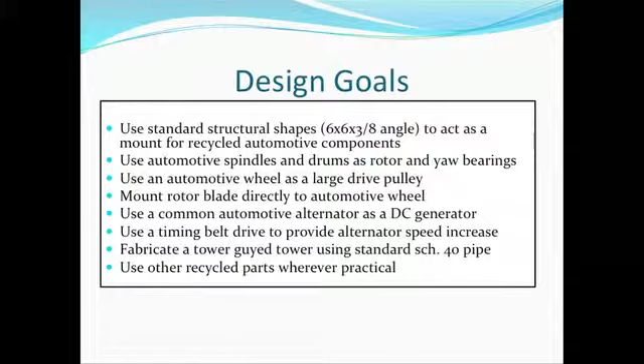They're designed for automotive use, so they can be plenty strong for what we wanted to use them for. We used automotive spindles and drums as the rotor and yaw bearings, the rotor for the blade and the yaw bearing so the machine can track the wind. We mounted the rotor blade directly to an automotive wheel. You'll see this. We used a common automotive alternator as a DC generator.

Alternators are a dime a dozen. I mean, they're scrapped all over the place. They're so cheap now that I see alternator rebuild shops kind of going out of business. You don't see as many as you used to see. So there's our DC source. We use a timing belt to drive the alternator. We got to speed it up somehow. We can't run it directly off the rotor, so we have to speed it up. We use a timing belt to get a speed increase, and I'll show you.

We're going to fabricate a guy tower using just galvanized structural pipe, and then we wanted to use recycled parts wherever we could. And the idea here was to eventually get folks to donate these parts so the material cost of this unit would be nothing, in effect. And we have CNC capability to do the basic machining that we need at Blue Ridge, or it'd be very easy to do. It's just drilling holes for the most part. I'll show you some pictures.

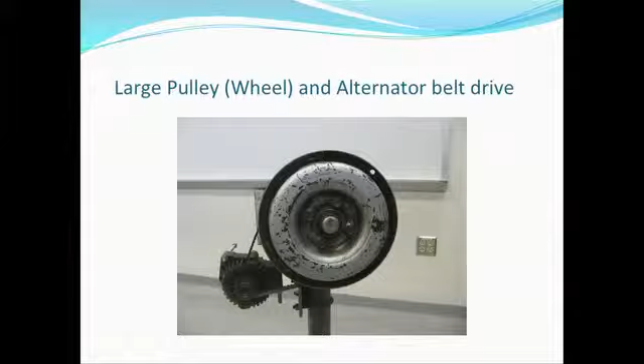This is a wheel, it's actually off of a VW Jetta, a front wheel, back wheel, doesn't matter. And you see the alternator mounted to it there, and that's the speed increase that we use, about a 7-to-1. We need to get that alternator over 2,000 RPM, 2,500 or so, before it'll put out any useful electricity. And we can go on. Okay. And there you see a side view of it. That's the belt drive from the alternator to the large wheel.

And when you start designing stuff like this, you got a lot of options in terms of what type of drive you're going to use. You could use gears. That would require some type of lubrication. You could use a friction drive. There's a lot of initial resistance to turning with a friction drive. You could use a flat belt, you could use a V-belt. There's a fair amount of resistance there too.

We chose the timing belt because we use a cogged pulley on the alternator, but we don't need to use a cogged pulley on the wheel because it isn't going to slip on the large pulley. It would only tend to slip on the alternator itself.

The whole point is this thing turns very easily, so we can just use the torque supplied by 12, 15 mile an hour wind to get this thing started to turn, and then once it starts to turn, it will pick up speed pretty quickly.

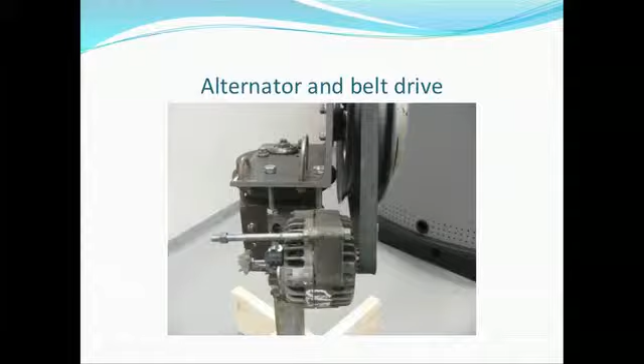And I didn't know if I show it, but we need to control the alternator's on and off. We can't just keep it hooked to the battery all the time, or the field in the alternator would run down the battery. This would be like leaving your ignition switch on in your car. Eventually, that would run your battery down. Take a long time, but it would run your battery down just by powering the field of the alternator.

So we have a centrifugal switch mounted on the back of that alternator that once the alternator is up to a certain amount of speed, that's what will turn on and off the juice from the alternator to the battery. There's that centrifugal switch. You see it mounted on the back there, mounted right to the shaft of the alternator itself.

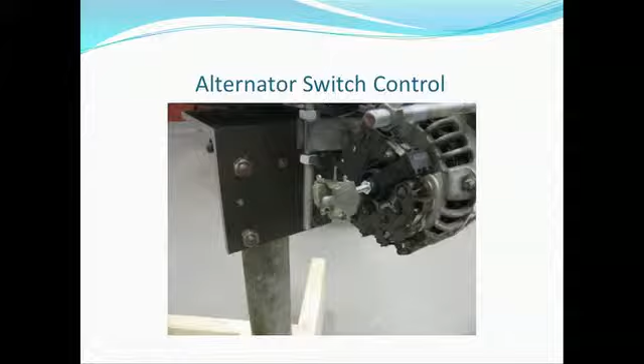And what we did to mount all this, we just used standard structural shapes. All of the units are mounted on 2 pieces of channel, very readily obtained common channel, 6 by 6 by 3/8. We got that actually donated to us too. And then we just drill holes in the channel to mount the components.

And the 2 spindles, and you can't see it, we'll look at a spindle in a minute, but we chose the spindles from the vehicles such that they are flat, and they just mount directly with 4 bolts. So, you know, you got a variety of different cars out there, but if you start looking around and seeing how they're put together, you find certain varieties that will mount much easier and without fabrication to the particular car part itself. Okay, one more. Nope, go back one, please.

All right, there you see a view of the back, and so what we have down at the bottom here, that's a brake drum mounted to a piece of channel with the tower below, and then there's another piece of channel that mounts where the rotor will go and mounts the alternator, and that's that standard 6 by 6 by 3/8 channel that I was talking about, and they just have holes drilled in them.

The 2 U-bolts you see there are where a tail vane will go in, because it'll be an upwind unit with a tail vane. Tail vane will just stick out the back, and in that brake drum underneath will be housed the slip rings. You know, whenever you're generating power with a unit and that unit is free to turn around, you somehow have to get a stationary output for the wires to come down the tower, or you will twist off the wire.

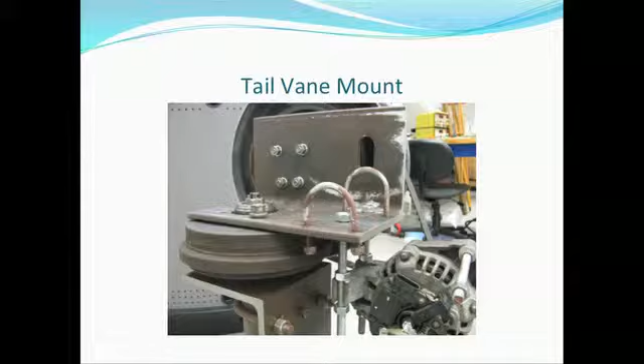And slip rings, again, there's a moving component that's charged and then a stationary component, and you slip them across. Next time you go on your next Ferris wheel ride or next time at the fair, look underneath and you'll see slip rings because they're getting power to that so it can move.

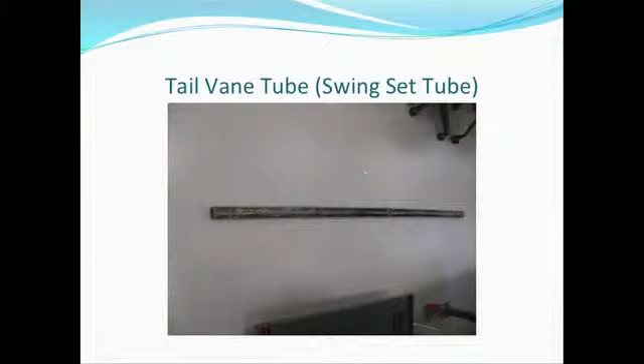Okay? Tail vane. Tail vane's just a recycled swing set tube. All right, tail vane tube, I should say. That'll have a piece of aluminum on the end of it to actually act as a tail vane. But all that is a steel, very light, very thin, recycled swing set tube. They're thrown away all the time.

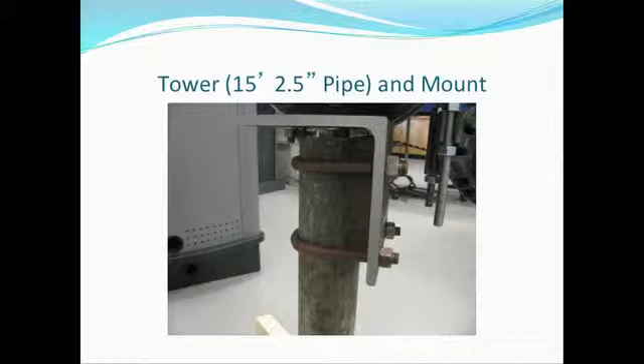Okay. Next, please. All right, there you get a view of how the tower connects to, again, that channel. There's the 6 by 6 by 3/8 channel, tower connecting to it. That's a 2.5-inch structural pipe. Schedule 40 pipe is all that tower is. That'll be 15 feet tall, and it'll be guyed with 3 wires.

That's probably the least expensive tower we could come up with. Just a simple guyed, single tube structural pipe. And the U-bolts that hold it, those U-bolts are the U-bolts that hold leaf springs to car axles. Okay, so again, we're trying to use recycled parts as much as we possibly can.

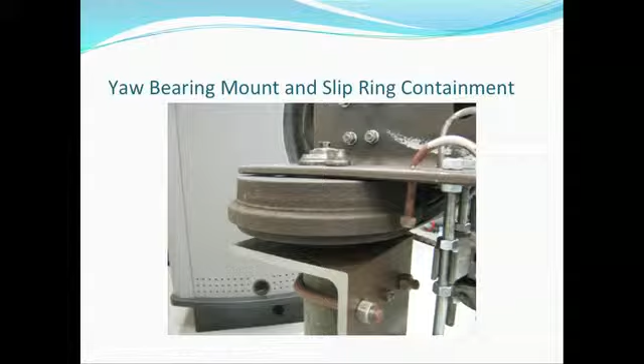Next. All right, there is again a picture of the brake drum, where the slip rings will be housed. There'll be a stationary part mounted to the bottom of the channel there, or the top of the channel, and then the moving part will actually be the brake drum that goes on the inside. There'll be two connections, a plus and a minus.

We could actually, just like a car, get by with one and just ground everything and have that be the minus connection, but usually on a wind generator that's not a very good idea, because when you do that, you are sending the minus through bearings. And it's never a good idea to send electricity through bearings, because it will pit them over time and deteriorate them. So you want to supply a separate path for that minus connection. One more. Okay.

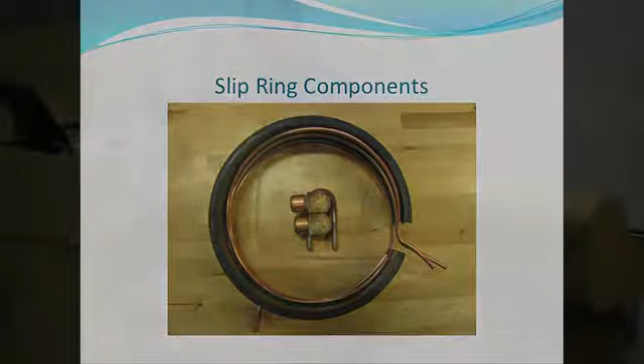That's what the slip rings look like. Just two. The part in the middle will be stationary, mounted to the bottom of the channel, and the wires you see going around, they will turn with the unit completely as you see it there. So there again, pretty simple parts. That's just a piece of PVC pipe that'll act as an insulator inside the brake drum, and the wires are just laid into it. And those are standard plumbing components that you see for the other ones.

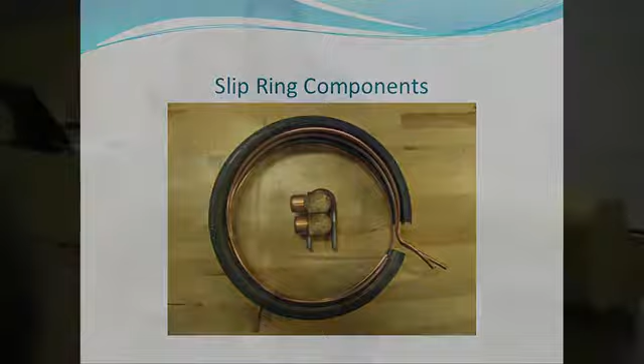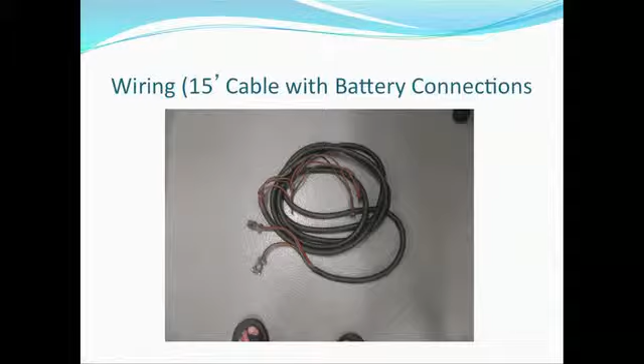They'll be spring loaded against the wires there that you see. And PVC insulators there, because you want to insulate that as it comes down. This connection will go straight to a battery. The idea would be that as a battery is charged up, whoever wants to use it wherever they need it would take it, and then you'd put another battery on to charge it up. And they could measure that charge with a voltmeter if they wanted to. While the unit wasn't running, that would probably give them a good indication of the charge of the battery.

It's a simple two-bladed rotor, and there's a lot of reasons not to use two-bladed rotors. Three is obviously for a lot of reasons the ideal situation, but whenever you start talking a three-bladed rotor, your connections for the three blades become much more complex. This is simply made out of a 2 by 6 by 10-foot board. So you can make a rotor that works pretty well, and again, we're relying on the robustness of our components to withstand the negative of a two-bladed machine, which tends to yaw through a series of jerking motions. But that should be all right for this unit. It'll be built strong enough.

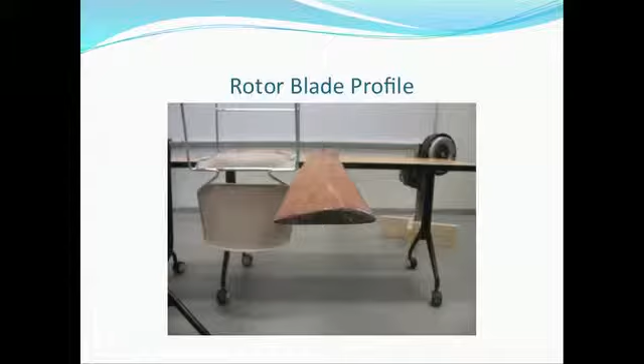And that's what the blade looks like at the end. It probably has about a 3-degree angle on the end, going up to a 12-degree on the root. But it's very simple to fabricate. I fabricated this blade in about an hour with a draw knife, and have tested it, and it works pretty well. So again, we wanted to keep the minimal amount of effort in this and make it as cheap as possible.

Excuse me? Yeah, it would be treated. Well, no, it would be coated with some kind. Yeah, at least. You'd have to protect it from the outside. That might be the end. Let's see if we got anything else here.

That is the end. So that's what we plan to do, and we've got this probably about 80% constructed, and we're gonna test it at Blue Ridge, send it down to Haiti, see how she does, and if it works well and there's a need for more, we will potentially start going around using our SIFE people, our Students in Free Enterprise, to get these parts donated to us. We'll specify what parts we need, and we'll start building multiple units. Well, that's what I want to talk about.

The turbine itself stands on a 120-foot tower. Blades are roughly 11 feet long. And the Czajkowskis are very happy with this installation. It was a really easy installation to put up, and this is probably one of the smoothest projects we've ever worked on for small wind.

So it was a couple months that we worked. I think we signed the contract in January of this year, and it was completed within 10 weeks. That's a really quick project cycle for us. We were just involved in the construction phase. These students did a lot to gain community support. They got all the permits, they got the money for the project. It's really an amazing model, and I hope it inspires other people down here to do something similar.

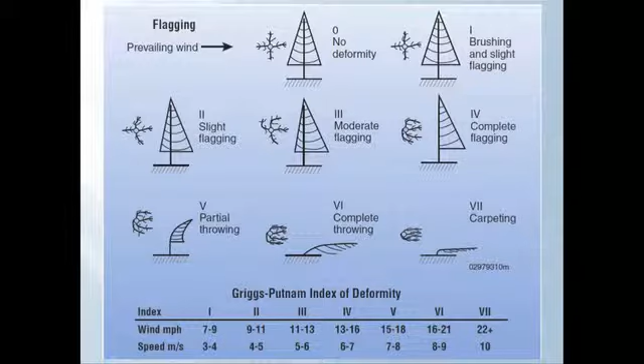If you're trying to determine if your site has wind, one of the very fundamental, easy things to do is to look at the tree growth. In this picture, you're looking at trees from the side, and next to the picture, you're looking down on the tree. You can see how the branches in a higher category of wind start to grow to one side of the tree. In our yard, we're at about a 2 or a 3.

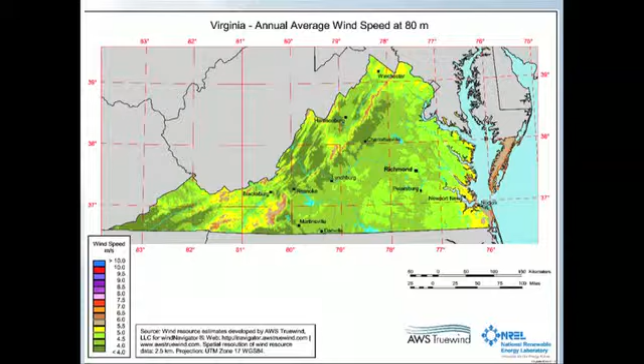And then, of course, you can consult wind maps. There's the wind map for Virginia. And if you zoom in, the next picture, there's Roanoke. You can see the little square that's Roanoke, and we're situated in that brown and tan area that has the most wind in that corner of Roanoke County.

Up to 1 acre, you can have an 80-foot tower, and if you have over an acre, you can have a 100-foot tower. Unfortunately, towers come in 20-foot increments. So if you have 100, they consider the height to be the tip of the blade. So we wanted to have a 100-foot tower and then to have the turbine on top, which has an 11-foot blade, that would be 111 feet. So they said, well, no, you're going to have a special use permit. So even though there was an ordinance, we still had to have a special use permit, or else we'd have to go down to an 80-foot tower, and then you lose a lot of wind, because the higher you go, the better.

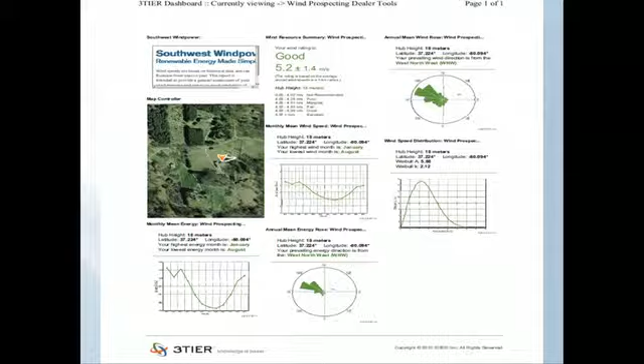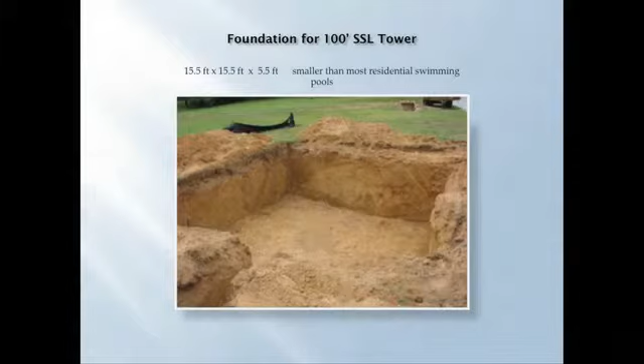All right, and then the fun part started when we finally got permission. So here's the hole for the foundation. And some of my neighbors said, oh, well, you're going to interfere with the water supply, you're going to have to do blasting, etc. No. So it's 15.5 by 15.5 by 5.5 feet deep, smaller than most residential swimming pools. And then they had to put in trenches. The whole yard got pretty well dug up.

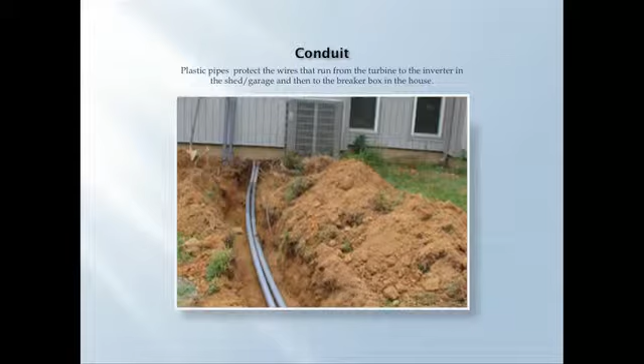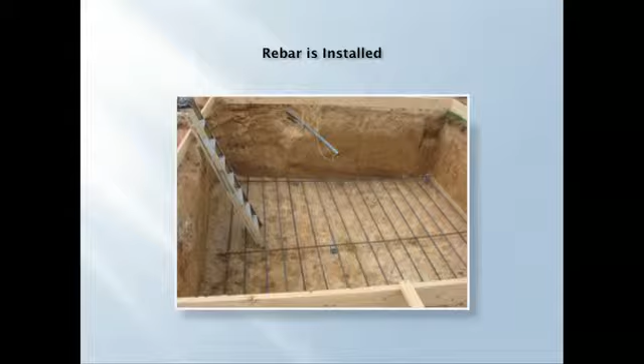And then we had to have rebar put in. This is all designed. Bergey gives you a set of plans, and you just follow the directions. We had a contractor do it, but it's all there. So you can see there's a whole layer of rebar on the bottom, and then there's the conduit coming out with a string in it to pull the wires through. And then it had to get a second layer, and you can see it crisscrosses both directions.

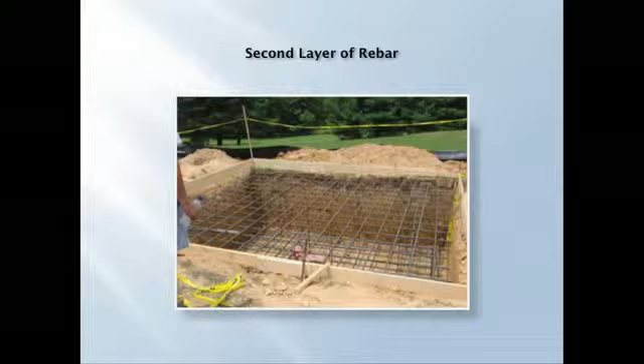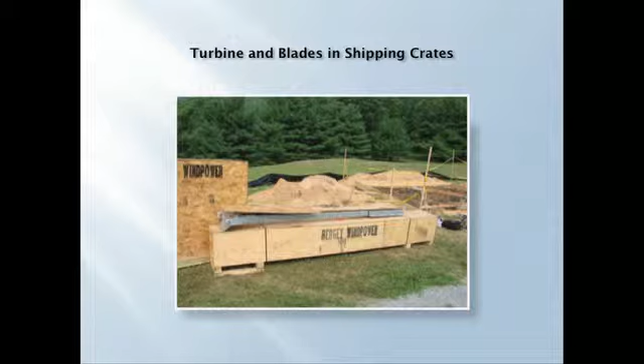And there's a picture of the turbine in its crate and the blades and the tails sitting on top of the crate there. That's how it came on the truck. Then a template had to be made to hold the bolts. The bolts go down about 3-4 feet into the rebar there, and so that template had to be the exact right size for the tower legs when the tower gets put on it. So that was the most critical thing and the most scary thing, making sure that the bolts were in the right place.

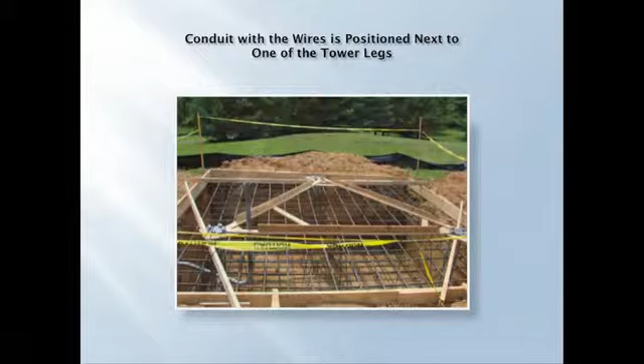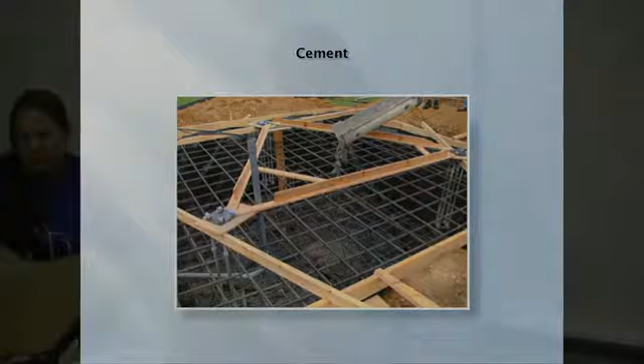There's another picture of the template. And there's the conduit coming up through the PVC pipe next to one of the legs so that the wire can go on up the tower. And here comes the cement. It took 7 truckloads, lots of, what was it, 56 cubic yards? Yeah, and there they are smoothing it.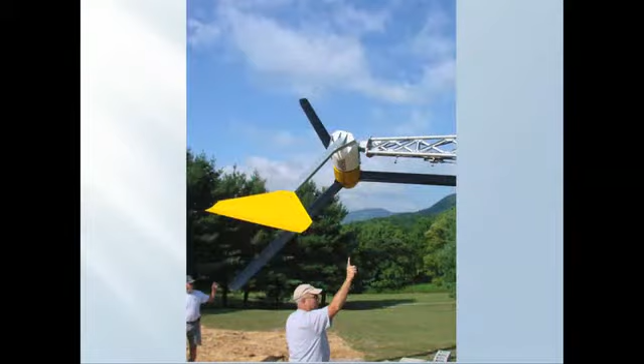Now we're starting to put the blades on. And like Loren mentioned, the blades are like 11 feet long. So the diameter is about 22, 23 feet. And now everything's all put together, so the crane can take it up. And here it is going further up.

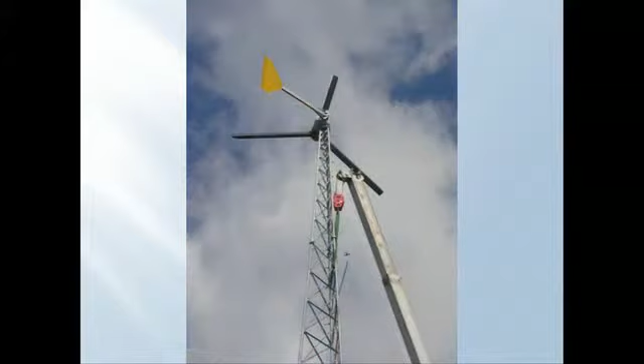And you can see on the little boom there, I wanted an anemometer because I wanted to measure the wind as well. And many times the anemometer came very close to the crane and nearly got taken out, but it survived. Yay. You can see how close it got. And there's another shot.

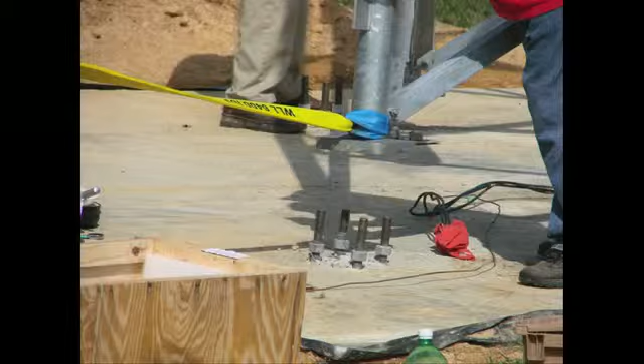All right, so now the tower is totally suspended in the air by the crane. So you can see it's up off the ground, and the people are busy trying to move it over, and there's the bolts sticking out of the slab, and they have to make sure that it fits down on there. Here comes a leg down on the bolts, and it fit. And so then one of their guys had to climb up there and detach the boom.